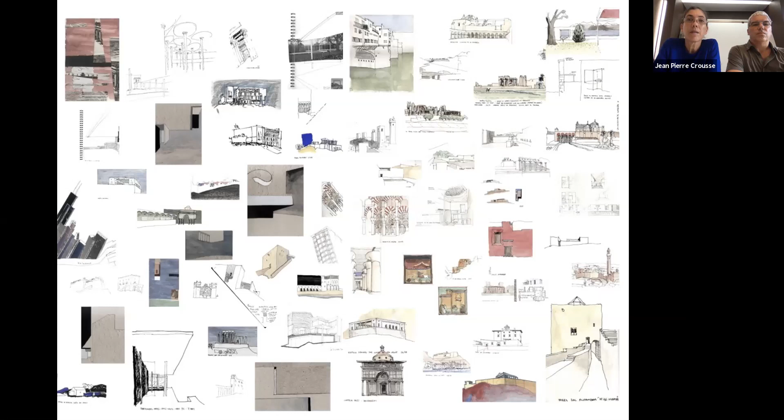A constant and resolute work is, of course, part of this patient search that constitutes what we call the culture of work. In each project, we go from sketches to the model, then to precise drawing into the reality, and then back again to sketches, models, and drawings. It's a circular dynamic between mind, hand, and matter.

The third aspect of culture comes from the layering of architecture through time. We are interested in studying our fantastic pre-Columbian legacy from the design strategies set in place to build a cultural landscape, and not simply seeing them as archaeological remains.

We are increasingly asking ourselves if nature, territory, landscape, and architecture can still be seen as interdependent and with the same value. We try to abandon the modernist, rigid separation of the disciplines of architecture, urban design, and landscape architecture, which have become distinct and often polarized professions.

Understanding territory, our second ingredient, is key to our work. The German scientist Alexander von Humboldt was the first European to realize that the section, and not the plan, is the only way to understand the Central Andes region, where modern Ecuador and Peru are located nowadays. In Peru, the combination of the Andes and a cold current coming from Antarctica that has Humboldt's name produce a unique tropical landscape. So we will redraw this section, including the sea current named after him.

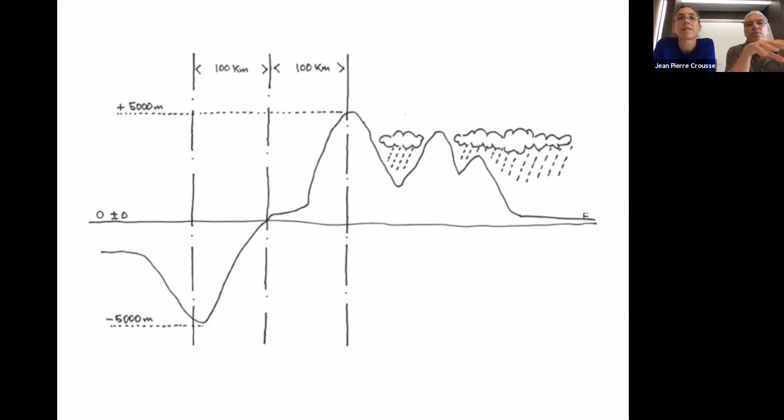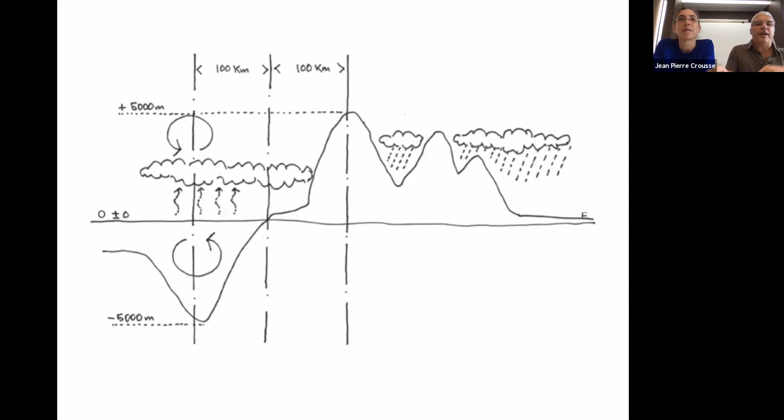In the Amazon basin, at right, climate responds to normal tropical conditions. But at left, in the Pacific basin, a permanent mild temperature and no precipitation at all happens when a sea current, seawater convection, and air thermic inversion combine to create an almost permanent cloud over the coastal desert strip.

As Jean-Pierre was saying, these territorial conditions make our tropic very different from the usual image we have of this latitude. On the coast, for instance, instead of palm trees and white sand beaches, we find an extremely arid and yet very humid desert. Our coast is a misty land with no shadows and no contrast because of the lack of sunshine at least 8 months in a year.

These conditions generate a very mild climate, our third ingredient. Climate gives us a huge opportunity for redefining architecture in its role of providing shelter. With absence of rains, extreme hot or cold days, no strong winds, we can concentrate our effort in its capacity of being generous and in the creation of intimacy and well-being.

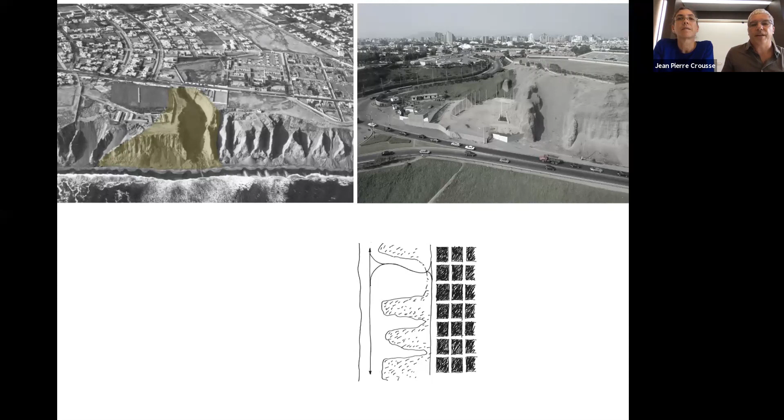We started our understanding of the site through its own memory. The site where we had to intervene was a residual area left by destruction of one of the cliffs when a roadway of the beaches was created. So we decided to embed the building within this territorial logic by building an artificial cliff. In that way, our addition would be related to memory, not only by its programmatic content, the memory of those violent years, but by the memory of Lima's landscape.

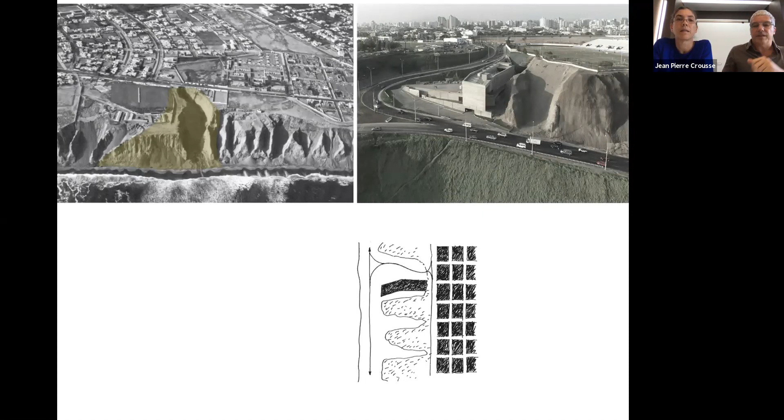Architecture helps discover the site, reveal it, and make it evident. In fact, the building, which is here, closes a sequence of cliffs and ravines that are like 10 kilometers long that characterizes the Bay of Lima.

In the same way that territory is more easily understood by a section, as Humboldt showed us, we'll explain all our projects only by the section. This is a challenge we want to take because we think section is the key to understand these projects.

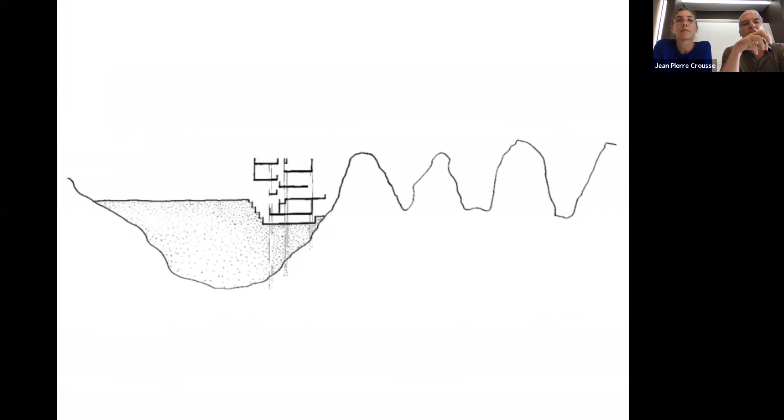So if we draw a cut-off longitudinal section of the cliffs, looking to this city, we can visualize the infill made to create the descent to the beach. A compact building near the natural cliffs allowed us to economize both on the number of foundation piles and in their depth. In this way, the territorial logic could meet the economic logic.

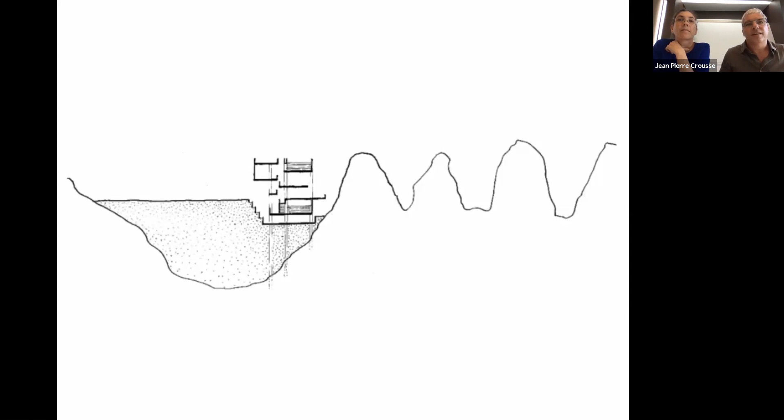We have to know that the Peruvian government didn't spend a penny in this building. It was all built by donations from the German government, the European Union, and the Swedish government. This is the only place of remembrance, of place of memory, that was built almost against the will of the government.

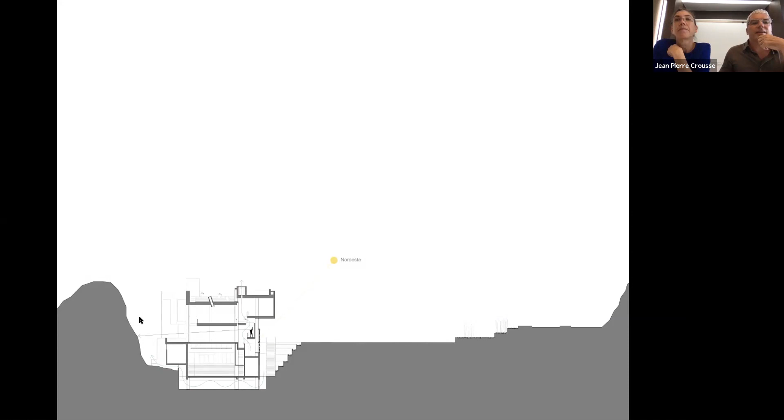So this simple strategy opened possibilities for responding also to environmental needs. Opening the building to the cliff allowed controlled natural lighting, and closing it to the northwest prevented us from the sunlight of the setting sun and the noise of the coastal highway. An open inner space inside the building creates natural ventilation, limiting the use of air conditioning to the auditorium alone.

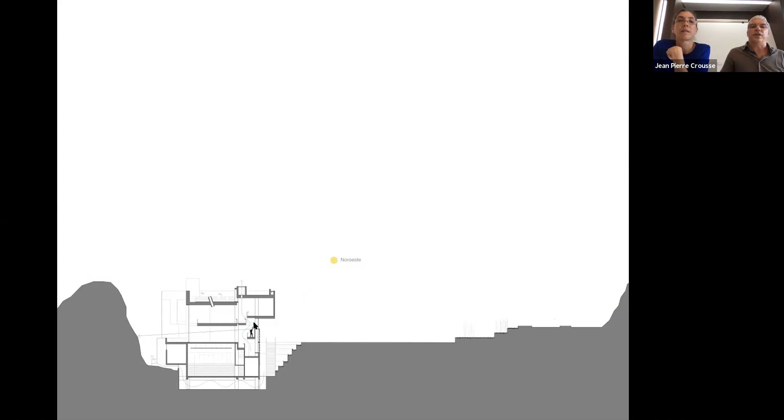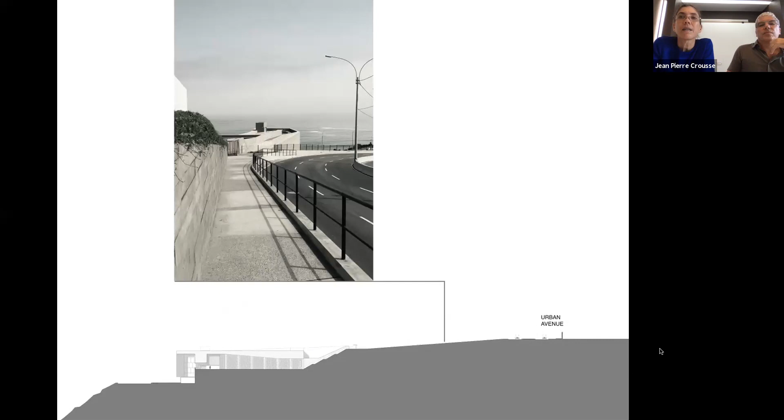The site had still a strong handicap: there was almost no connection to the city. A long distance separated the site from the main urban avenue with public transportation. We decided to transform this major problem into a design opportunity. We created a narrow passage to introduce time in the way we approach the building. The visitor can take the time to distance himself from the city, leave daily preoccupations behind, and get ready for an exhibit which is not easy to see.

The visitor is literally submerged in a gap created between the cliff and the building. The act of descending into this crevice turns gravity into a very explicit force. At the bottom of this newly created ravine, there is a marked physical consciousness, a kind of intensified presence. We are no more in an urban setting, nor in a natural landscape.

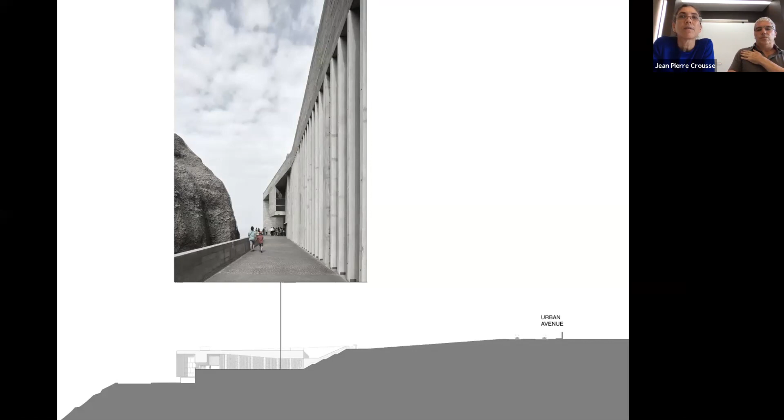The other side of this artificial cliff is defined by a platform that looks over the sea, conceived as a public space for reconciliation. The pathway continues inside the building. A system of ramps ascending toward the light leads us to the exhibition spaces.

Everything we see here in this picture is in the order of the permanent, because space in this building is defined by structure, not by technology, not by thousands of layers of materials of insulation, waterproofing, heating, and cooling. So once structure defines what is permanent, once structure defines what is space, it allows us to configure not only the interiors, but also the transition between the interior and exterior, which has the responsibility of capturing light and bringing it to the interior.

The program, our fifth ingredient, isn't a list of functions, but the way usage can inform space as a container of experiences. The notion of time is present also when we walk through the building. The different exhibition spaces are accessible through a series of ramps. We climb smoothly, taking time, guided by natural light, so we can raise our sight and move through space, dissociating the path of the eye from the path of the body.

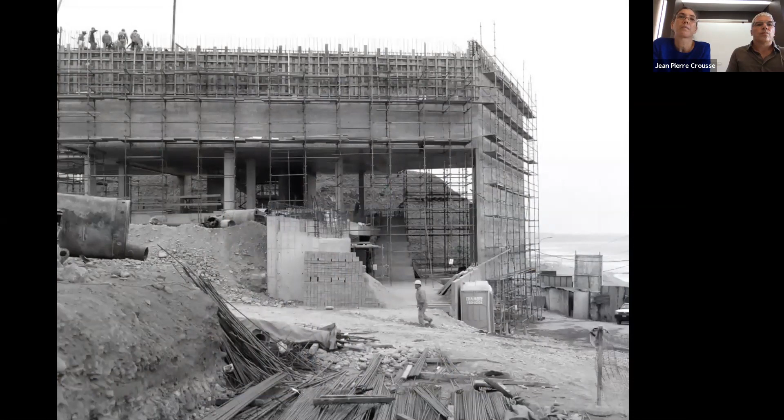Technology is our sixth ingredient. It is defined by what's available in the place we're intervening. And in Peru it has a lot to do with craftsmanship and limited resources, rather than the illusion of perfection that industrial components might give us. The building processes are very important here, as the design process does not finish with the construction drawings.

Being aware that the quality of public construction was not as good as we expected, the project's strength shouldn't be based in the quality of finishings. The artisanal formwork that we decided to use, as you see in this image, were assembled by hand using old wooden planks and introduced indetermination that absorbed all the true imperfections.

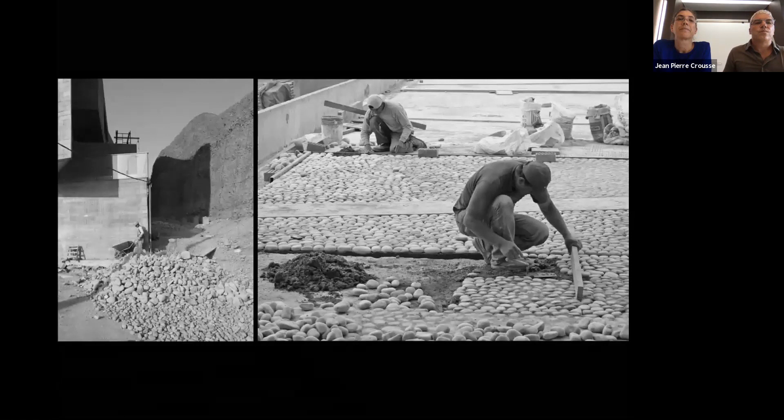We consider the traces of those imperfections as part of the memory of construction. You can see all this really made by hand. And suddenly we realized the plans that we had drawn lost their supremacy as the building itself started to draw a map describing its construction process. The irregular walls, the cobblestone pavement you see here, and the traces of handcrafting are the evidence of human labor and become the maps of human intervention.

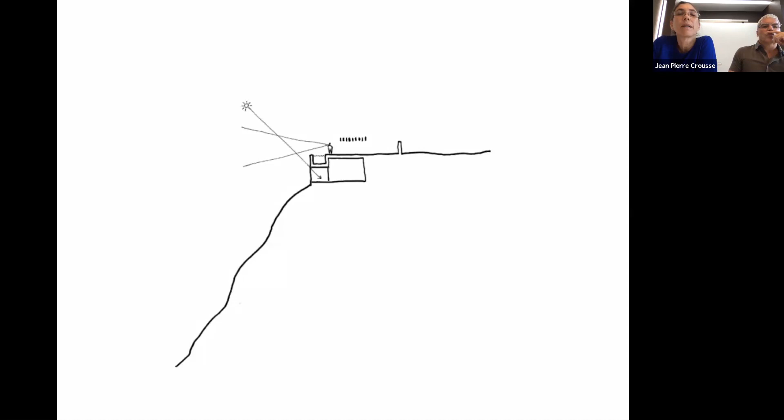Equis house, designed a few years before, while still working in Paris, was the starting point of this laboratory. The W houses were designed in different years between 2008 and 2014. They followed the same strategy as Equis House, which ensured a strong identity beyond the differences in program. From the ocean, the houses seem emerging from the cliff as extruded volumes, while from the desert, they seem to be excavated on the sand. And now let's see how life takes place in the house.

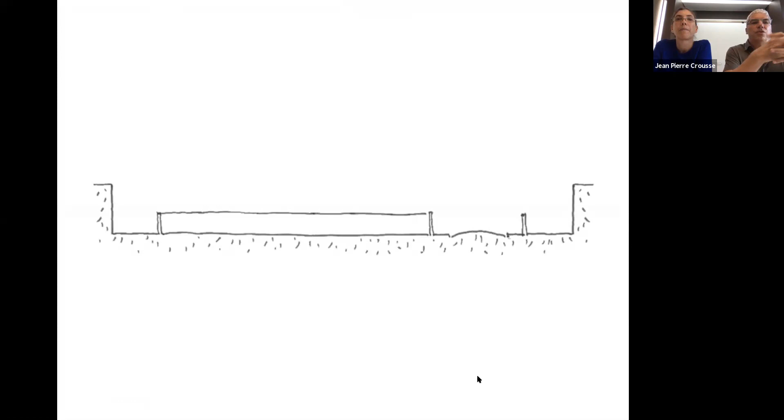So we draw the plot section with the back neighbor at left and the street at right. Then we define the limits of the plot, mandatory in the urban regulations. And we introduce open air features as a pool at left, a pond at right, and gardens planted with trees.

A series of 3 vaulted bridges spread over the width of the plot, and these bridges sustain the program of bedrooms and intimate spaces, leaving the ground floor completely fluid and open. So from the street, the house doesn't reveal its interior. It's a very common feature in Lima.

The first vaulted bridge acts as a threshold between the street and the interior landscape. Once you cross it, space suddenly unfolds. We discover a world where interior and exterior blurs with reflection and transparency. The space expands through these vaulted bridges, liberating the boundaries between house, garden, and pool, between interior and exterior.

The vaulted bridges are linked by suspended metallic walkways, which create a new transparency at the upper level, where bedrooms are located. From the bedrooms, the enclosure appears as an artificial horizon.

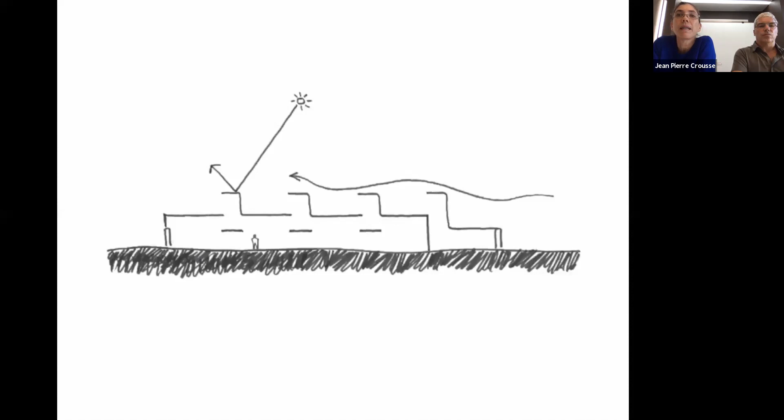Finally, a series of low-tech environmental devices find their place beneath the roof and help define the exhibition spaces.

The original museum was built in 1964 by German archaeologist Friedrich Engel. We decided to keep its memory by building in the exact same location, respecting the overall volume and geometry, and by the way, avoiding archaeological surveys that were mandatory if we built elsewhere in that site.

As we couldn't reuse the stones, and the original quarry was inside the protected area and therefore impossible to obtain new stones, we decided to use the same polished ceramic technique for finishing the pre-Columbian vases, rescaled to the size of the building. We used a pozzolanic red cement resistant to the saltpeter of the desert soil, finished with a handmade polishing as if it was a huge ancient vase.

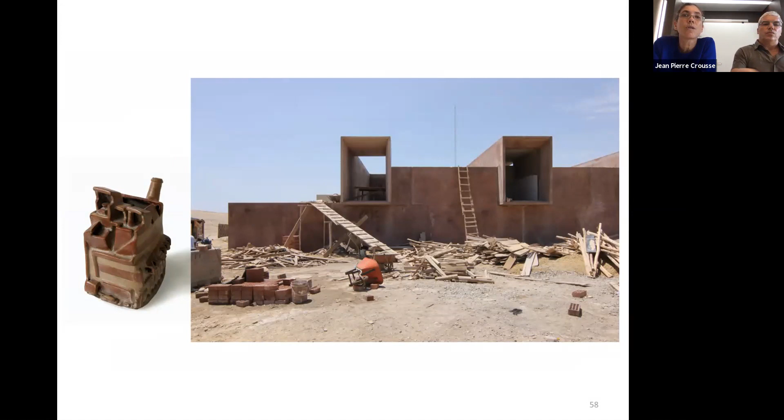And again, as in the place of remembrance, the building becomes a map describing human traces of construction. A porch announces the entrance to the enclosure, acting as a threshold between the vastness of the desert and the open air inner circulation. The different programs are related among them by this contained exterior space.

The main volume at left shelters the archaeological exhibition, while the volume at right hosts the workshops, services, and spaces for the community. The vertical volumes are the environmental devices that help control light and natural ventilation, avoiding sand coming in during sandstorms. Each device has an additional function. One of them constitutes the entrance of the museographic spaces, while another defines a courtyard for the archaeological quarters.

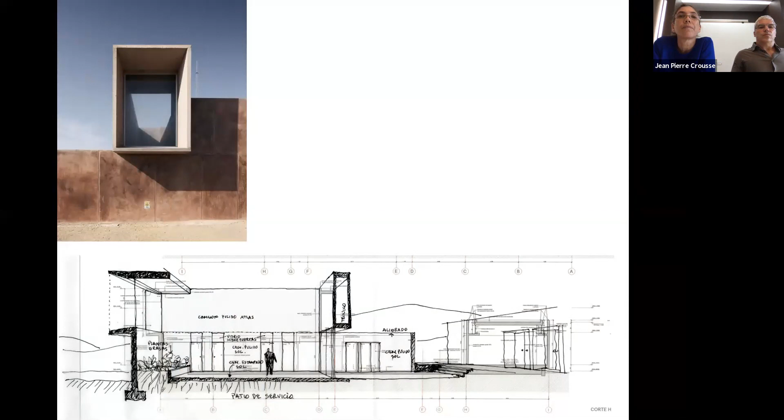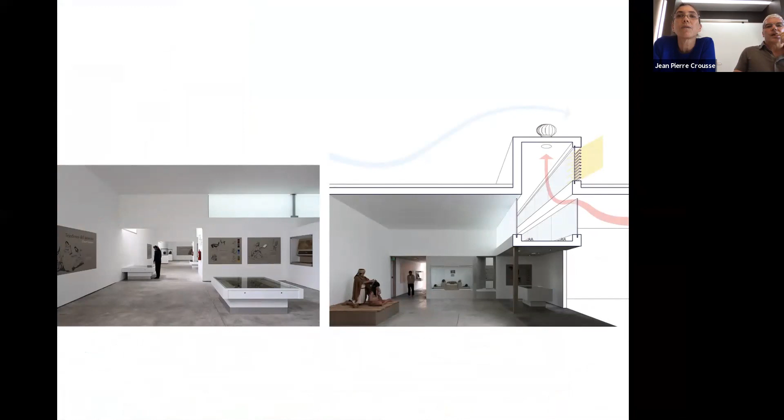These low-tech environmental devices are designed to be able to receive more sophisticated technological equipment in the future, if necessary. They define the exhibition spaces and organize the museographical sequence in a continuous and fluid space. The devices are also structural elements, and when they reach the southern facade, they become windows framing the boreal hills.

From this experience, we started using the pozzolanic red cement in other projects in which it made sense, as in this house we designed some years later, some 100 kilometers north from Lima.

And this cement, we should say, this concrete that we use, it has no tint. It's only obtained by the color of the cement.

So the program is divided in separate volumes that merge with the natural topography. Here the enclosure fades away and you have to find your way into the house by turning around containing walls and platforms.

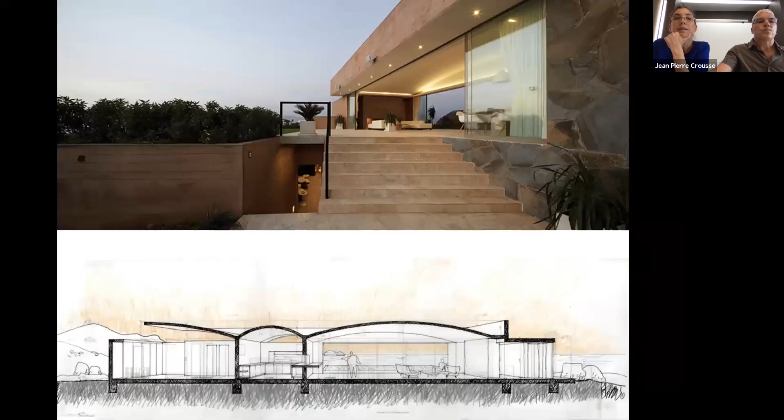We organize the main spaces under a vaulted roof, providing shade to the social and dining areas. The rest of the intimate spaces are located underneath platforms, their top surfaces being used as gardens or terraces, as we can see here at left.

Not all deserts are as arid as this one. If we go 1,000 kilometers north, we arrive at Piura, where the desert is formed essentially by carob trees growing over sand dunes. Every 10 or 15 years, tropical rains come down with the El Niño phenomenon, letting them grow and survive until another one comes 10 years later.

Piura is located in this landscape. It's a booming city only 4 degrees south of the equator. The local university needed more space for welcoming a new student population from low-income rural backgrounds, able to pursue their education thanks to government scholarships.

In 2015, Piura University accepted 700 of these students, so new facilities of generic classrooms and faculty offices were needed. Their aspiration was to take this opportunity to improve teaching infrastructure, and it gave us the opportunity to go beyond a standard response to this need.

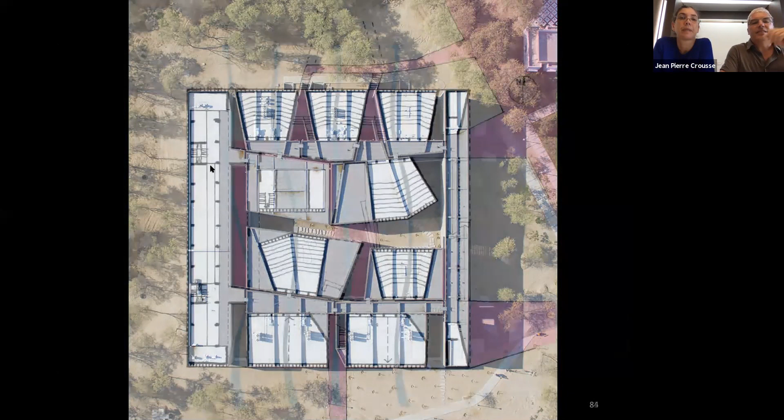As in the dry forest, where the single tree is no more important than the whole, 6 different building types from 11 independent structures are disposed in a regular volume of 70 by 70 by 9 meters height. This apparently compact scheme shelters, in reality, an extremely permeable, shaded and cross-ventilated space.

Following the logics of an oriented building, the south and north sides are protected by vertical louvers, which are very efficient to protect both facades in this latitude.

In the west facade, a system of prefab concrete panels protects the faculty offices from the setting sun. The building that hosts the ramps and services constitutes the east side, where the access from the campus pedestrian pathway is located.

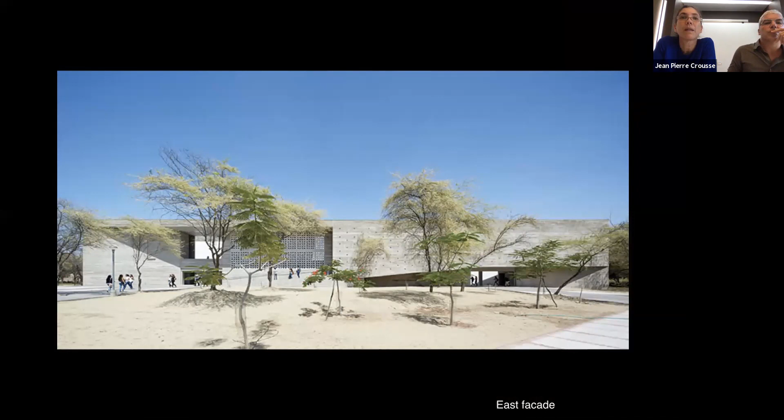The entrance building is in fact a threshold where we pass from the strong glare of the equator—we are only 4 degrees south from the equatorial line—to the shaded exterior spaces of the learning landscape. The lattice shuttering serves as a light modulator, accommodating our eyes to the shaded half-light spaces as we go up through the ramps or just get into the building.

The narrow gaps that single buildings leave between them, due to seismic regulations, help the light come in and favor natural ventilation. The gaps oriented east-west are in fact calendars that register the sun's inclination over the year.

We are only 4 degrees south, so the sun comes vertical from the north in winter and from the south in summer. This picture, for example, was taken during winter because it's inclined to the north, here. And when this line appears in these walls, we know it's summertime.

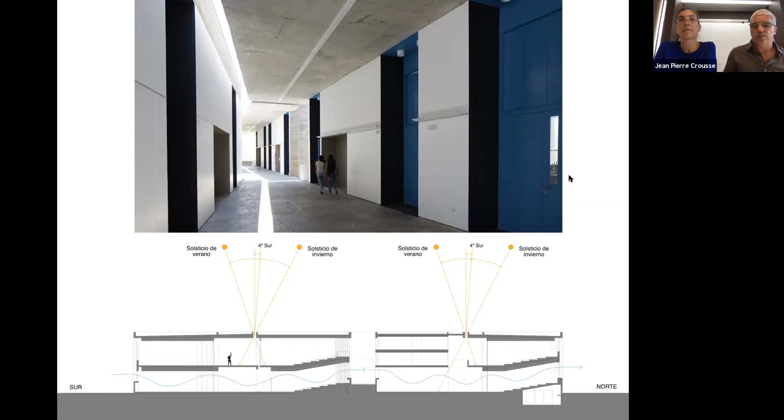There are others oriented north-south, so they are sun clocks that register the daily movement of the sun. There are moments in which both directions cross each other, where calendars and sun clocks meet.

Throughout the building there are spaces where people can gather, rest, or chat in between classes. Spaces are modulated to favor different kinds of gathering together. Many things can happen in these intermediate spaces, such as this informal class.

As we get into the complex, these spaces become more important until we arrive at its core, where the intermediate spaces are crossed by a stretch of the tropical dry forest. So let's see now how a normal day goes by in this building.